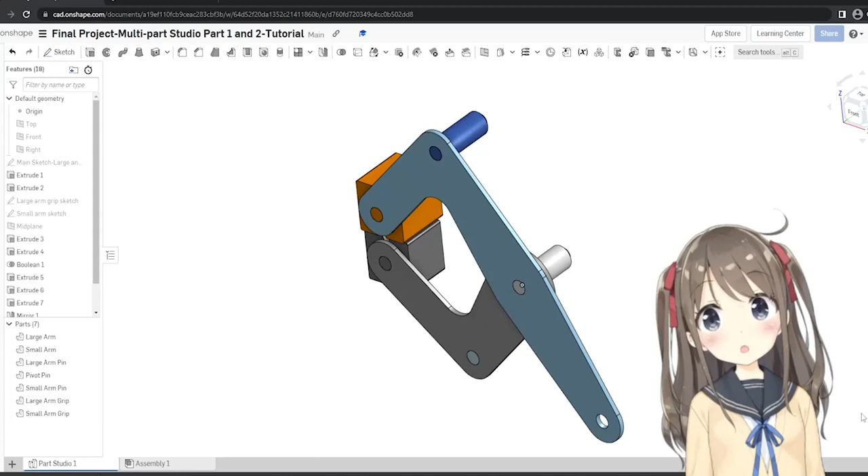Hi, good day everyone. On this short video, we're going to perform a comprehensive tutorial about making a multi-part studio, emphasized by deriving a part from another part studio. It is an excellent way to assemble parts as a flexible design output with the help of knowledge gained from computer-aided design exploration. In this tutorial, we will introduce a thorough application of what Onshape can do. The design we are going to make is a clamp, which will contain multiple parts of a component as well as multi-part designing in a single part studio, without motion, which will be done in assembly.

Before we start sketching our part studios, click on Workspace and change the units to millimeters. You can also change this to kilograms, and start a new sketch on the front plane.

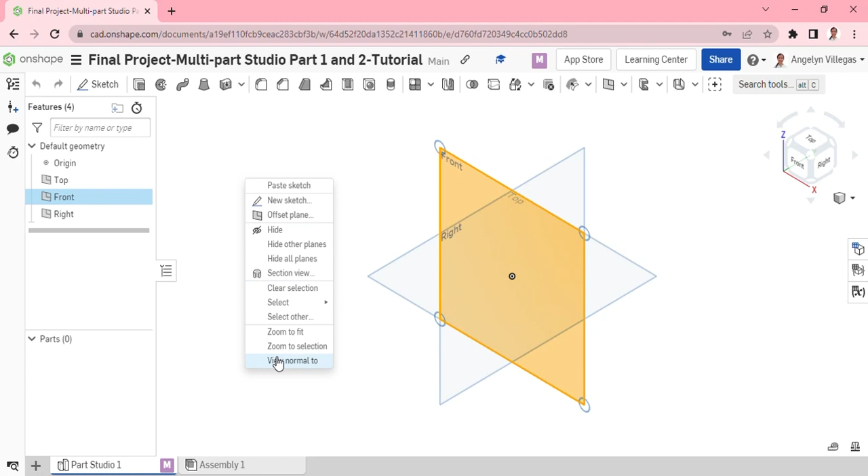Right-click and select View Normal to Sketch Plane. Right-click again and hide all the planes. Then click Line, draw a horizontal line coming from the origin, and draw the rest of the lines.

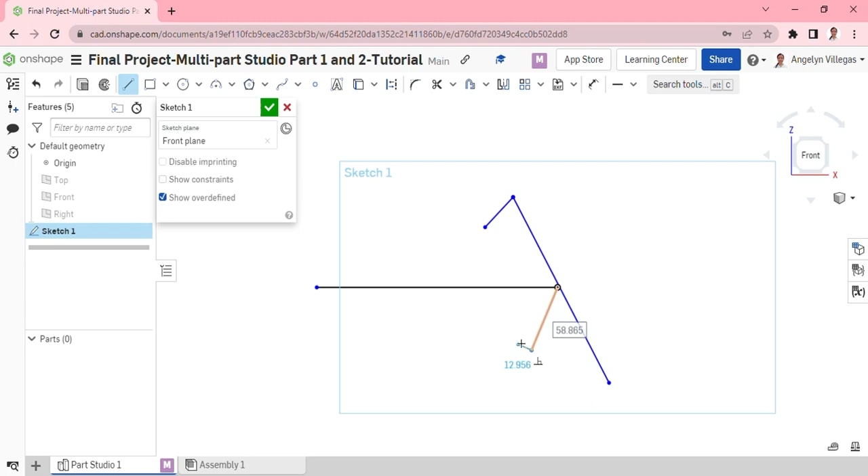Select all the lines drawn and make them construction lines. Select these three lines and click Equal. Select this line and the origin, then click Midpoint. Select these two lines and add Perpendicular. Then select this point and this line, and select Symmetric.

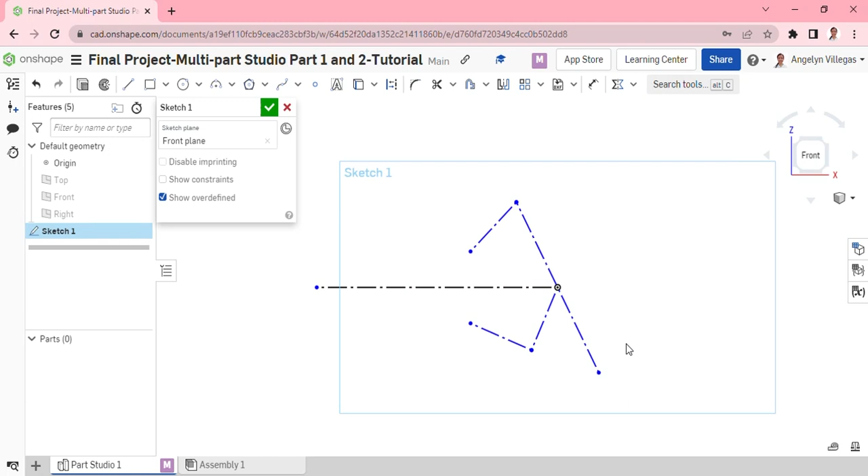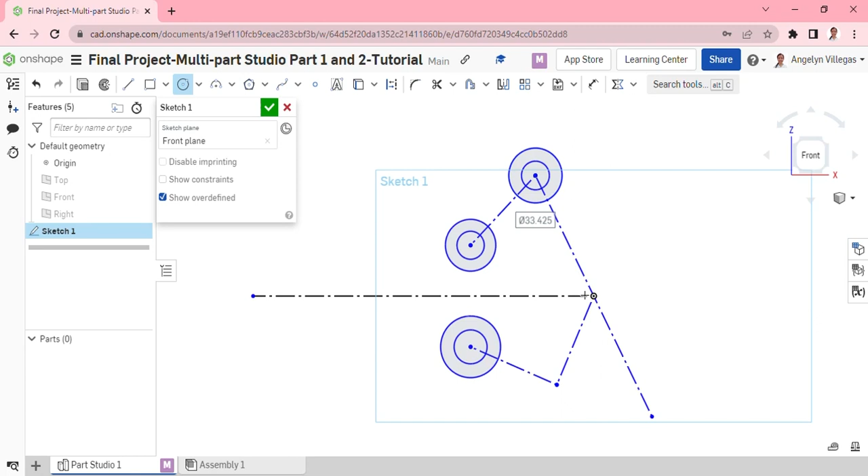Next, draw several circles, a smaller inner circle and a larger outer circle, on all the vertices and endpoints. Then select all the inner circles—there should be 6 of them—and click Equal. Now select 5 outer circles, except the one coming from the origin.

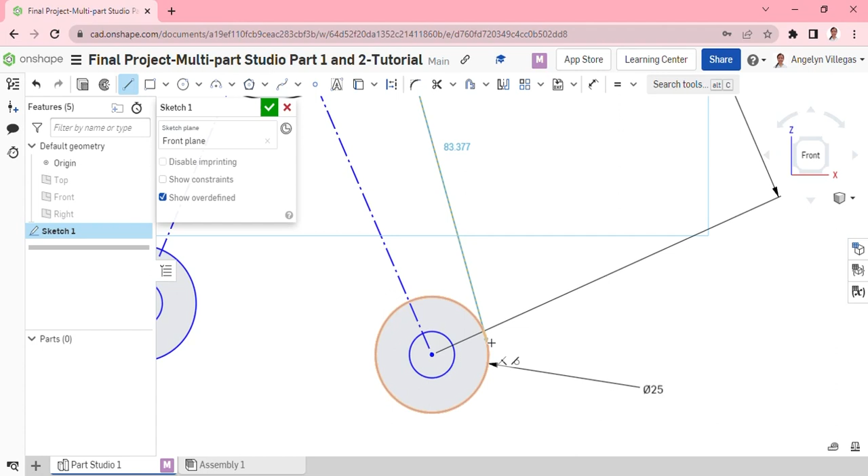Next, draw the following lines. It should be tangent on the circles as the line reaches the other circle—watch for the tangent icon to show up. This one's going to be different; it's not going to touch that circle, but it will touch the circle to the right of it. Look for that tangent icon.

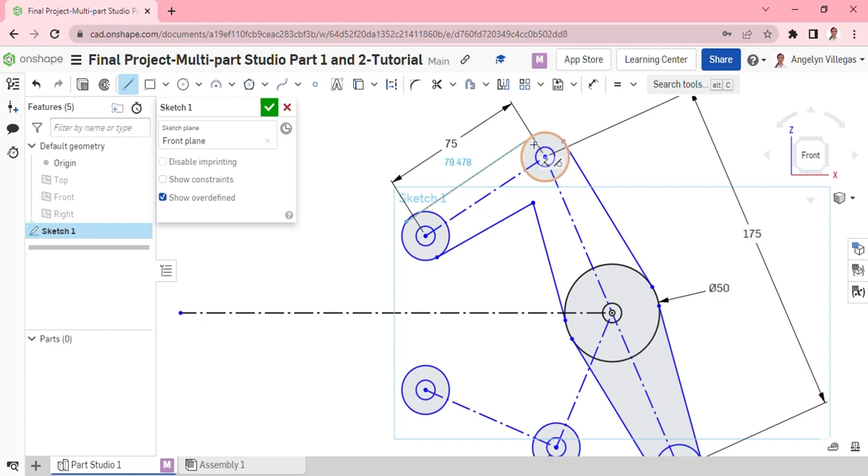Next, select these lines and these circles and click Tangent. Then do it for the other components as well.

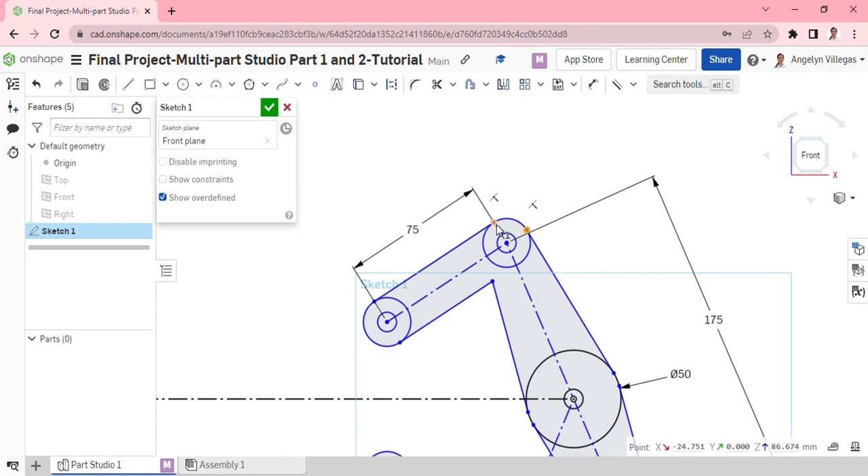Now select these two-point vertices right here and select Horizontal, and it should make most of your lines black, or fully defined. Then observe it in View Normal to Sketch mode.

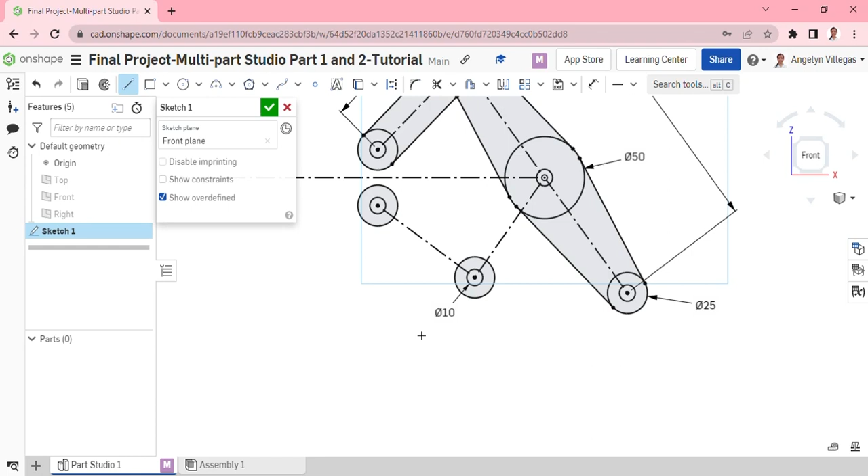Continue drawing lines from this circle to this circle, and this circle to this circle, watching for the tangent at the following points. Look for the tangent icon to show up. Add the constraints again: select this circle and designate Tangent, then click this circle and this line for Tangent, and so on once again.

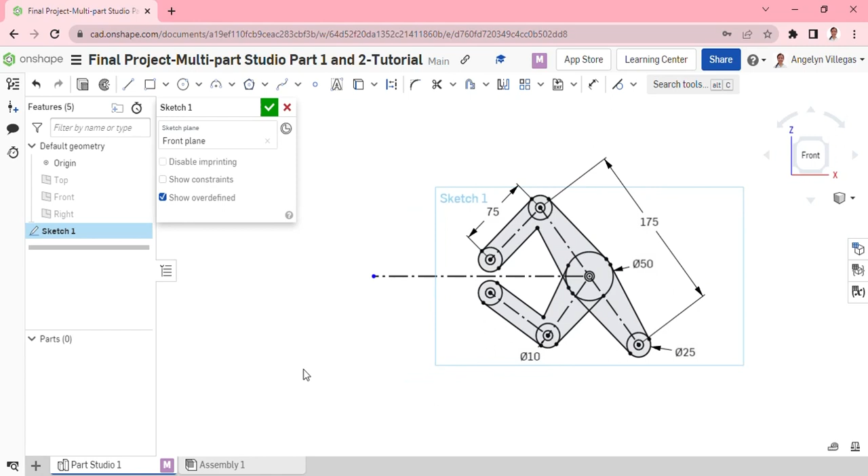After it all, check it out in View Normal to Sketch. Then accept it as the main sketch, for the large and small arm.

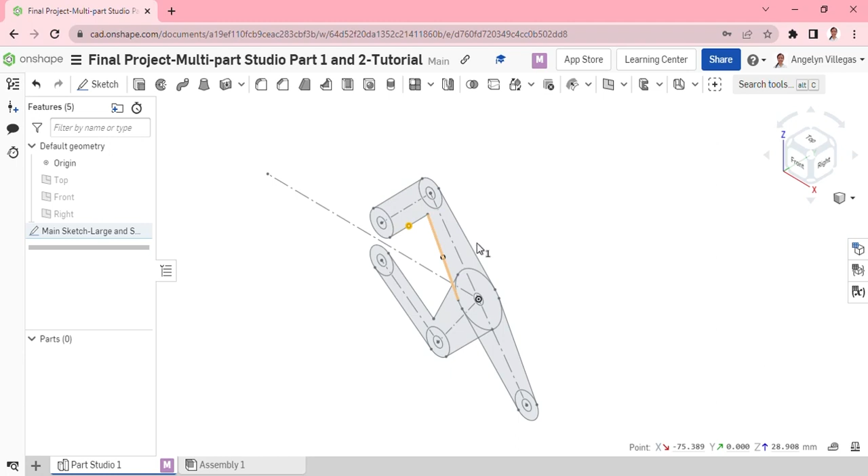View it isometrically, then select that portion to define the sketch.

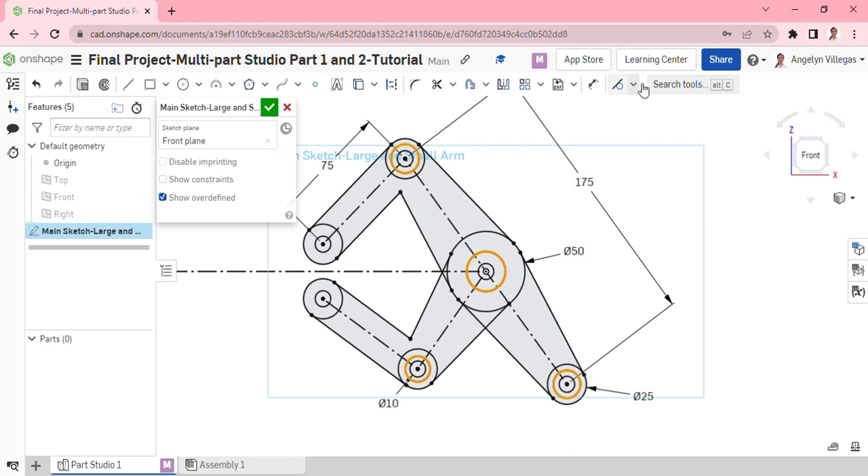Select and create all 4 circles here, and point out Equal mode. Then select on the sketch, fill it, click on those 2 points, double click on the number and type 15. Click to fill it and click Equal.

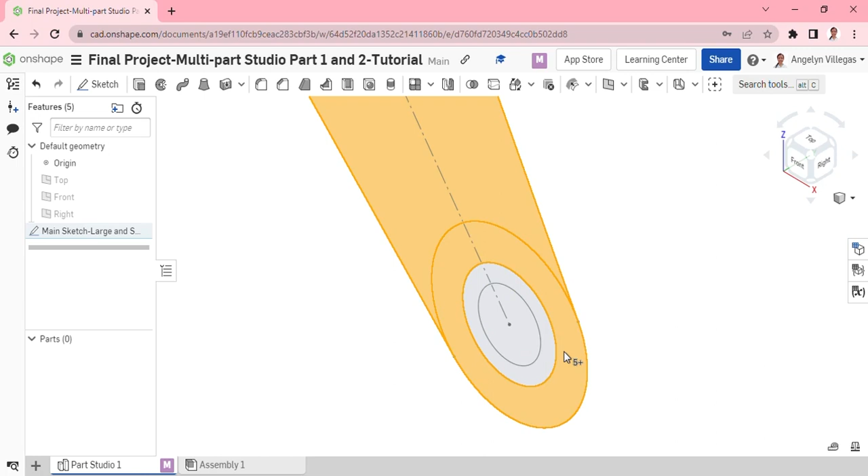As the piece is in isometric view, click Extrude as the main sketch is being highlighted. Set the depth as 5 mm and make sure these faces here are all part of the selection.

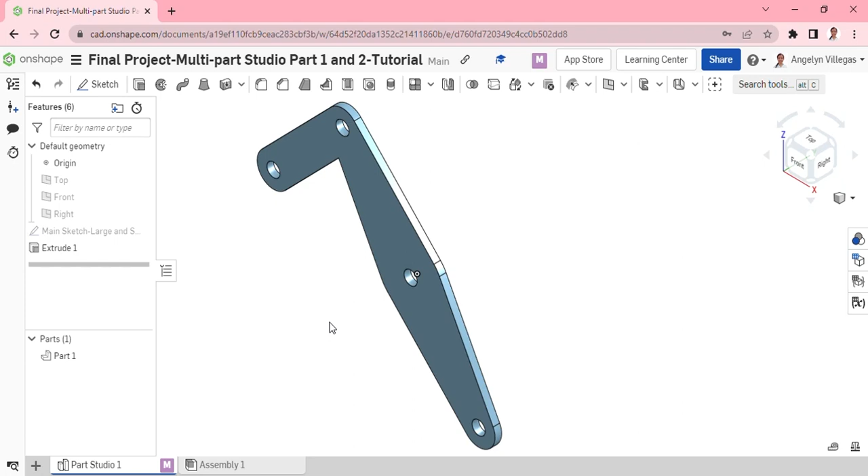After this process, change the name of Part 1 into Large Arm by selecting these spaces.

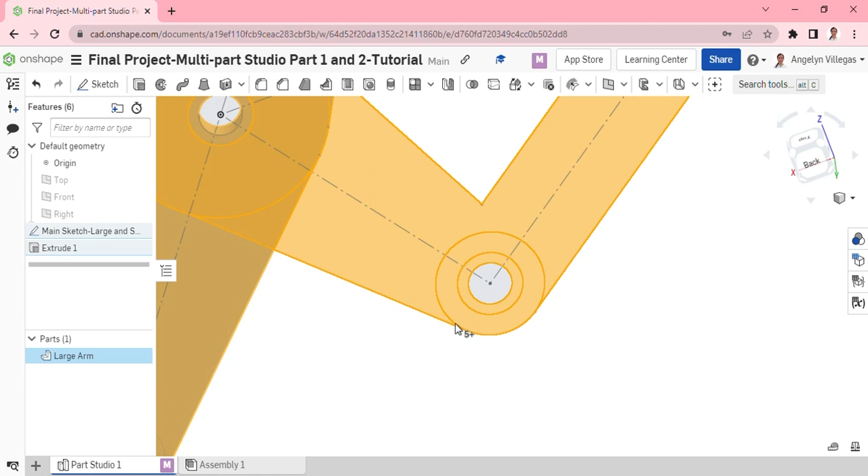Select Extrude. Select New Extrude with a depth of 5 millimeters, and then accept.

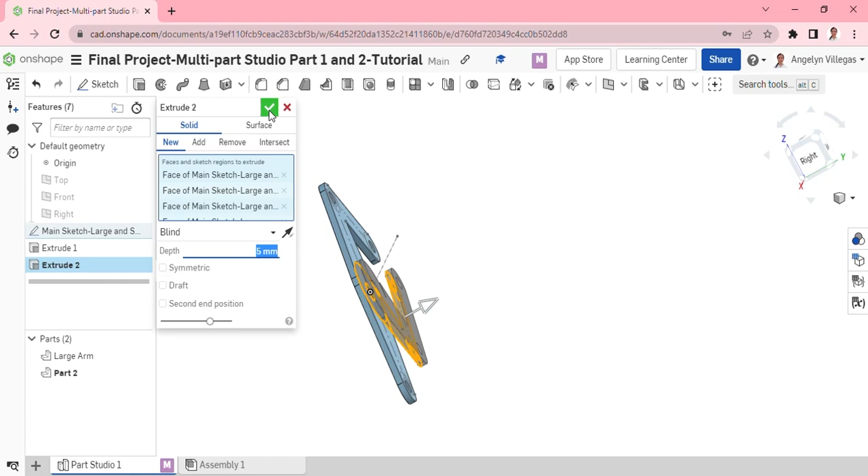Rename Part 2 as Small Arm, and then let's view and check it isometrically.

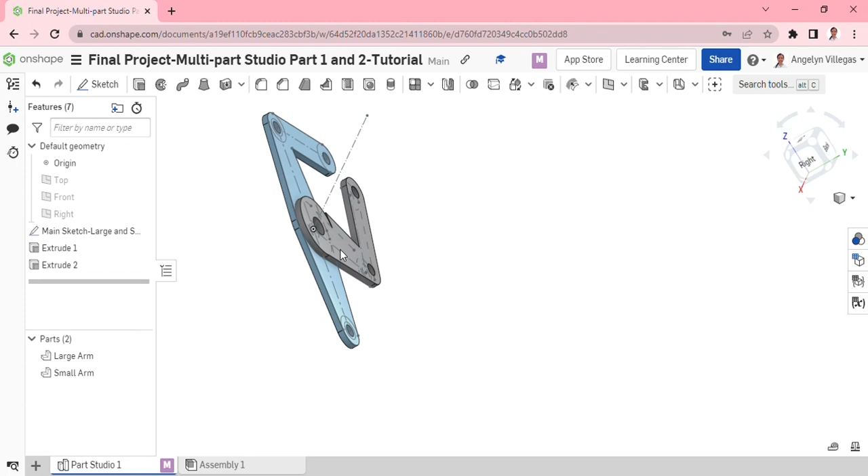Zoom it out and pick this section. Then select Sketch, View Normal to Sketch Plane.

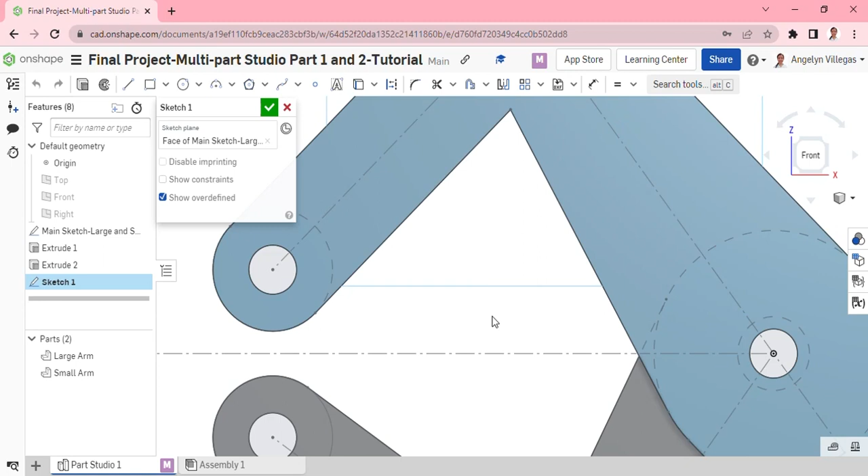Then wait, as it may take a few moments since the tool has quite unrecognizable behavior.

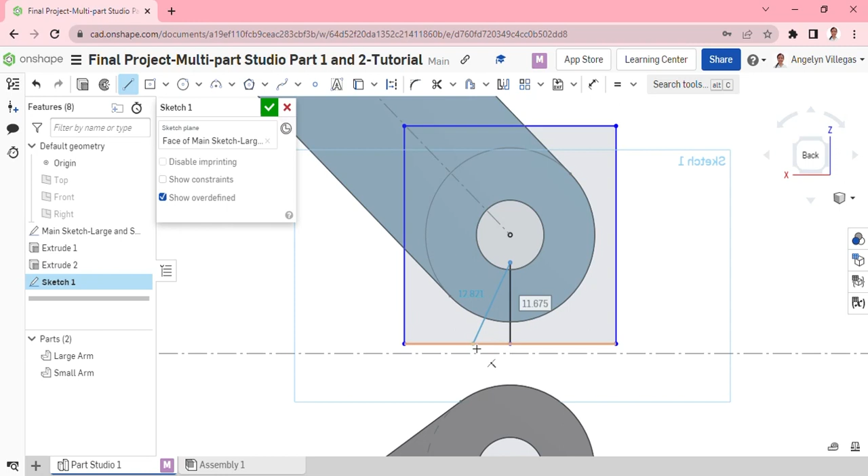After creating the shape, select the Line tool and point it out here upward, then like this, and do it on the other side as well.

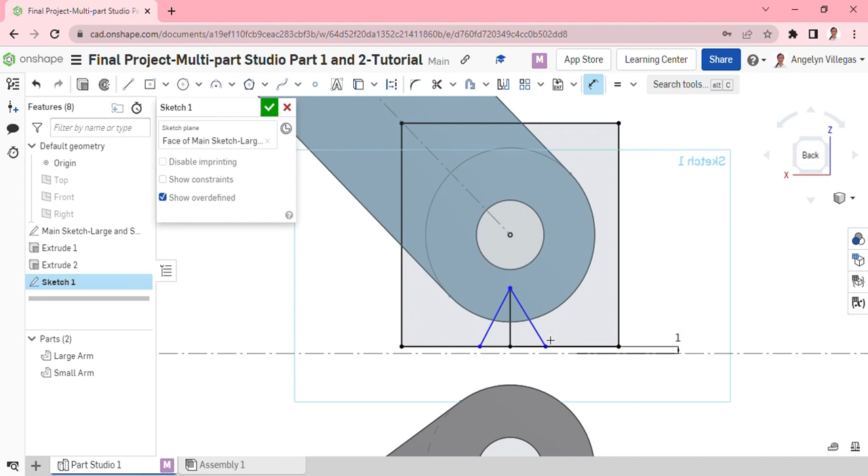Click the construction line at the base of the line of the square and put 1 as its dimension. Then from that vertex to the base is 10, same with the base itself.

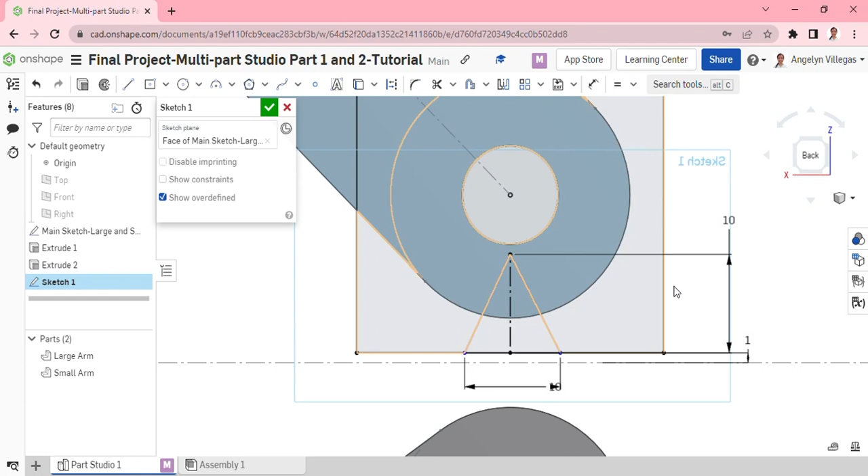We can select this line and make it a construction one. Then this side, or these two lines, we will make equal. Then before we check it out or validate it, let us rename it as Large Arm Grip Sketch.

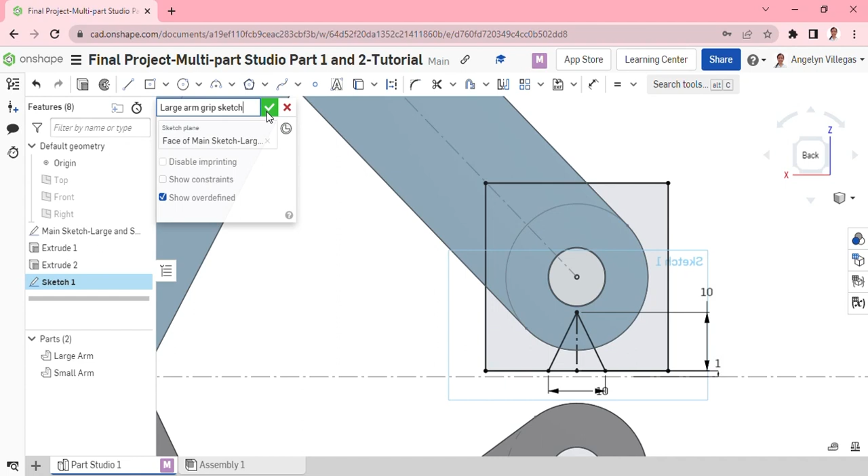After that, we can select this one for the extrude portion of our object. Here, we can edit it out to make it good.

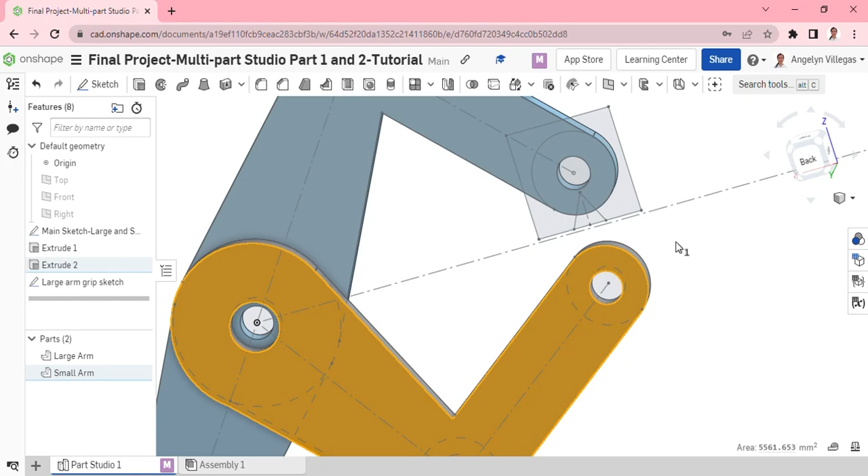After that, we can view it isometrically. Then we can zoom it out and rename it as small arm sketch.

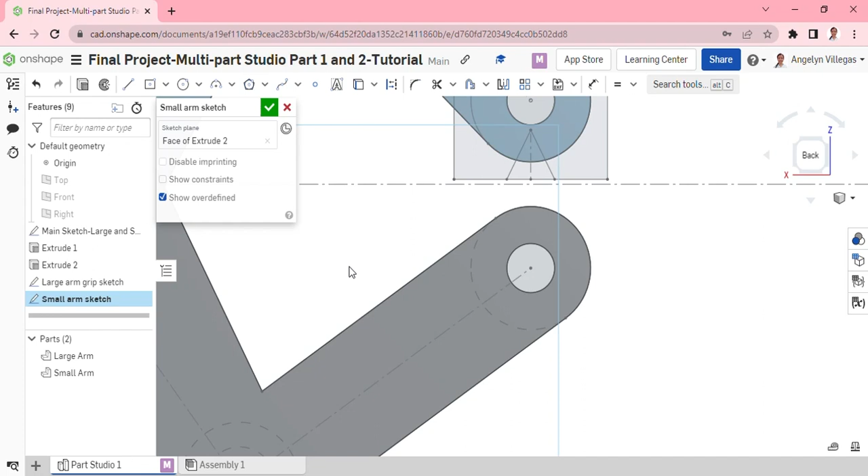On the upper portion, we can click the square mode that we're going to use here, like this, from the center point itself.

As we can observe, it is just a similar portion of the upper object here, of the upper square that is being shown. We're going to have this as the dimension of this in millimeters.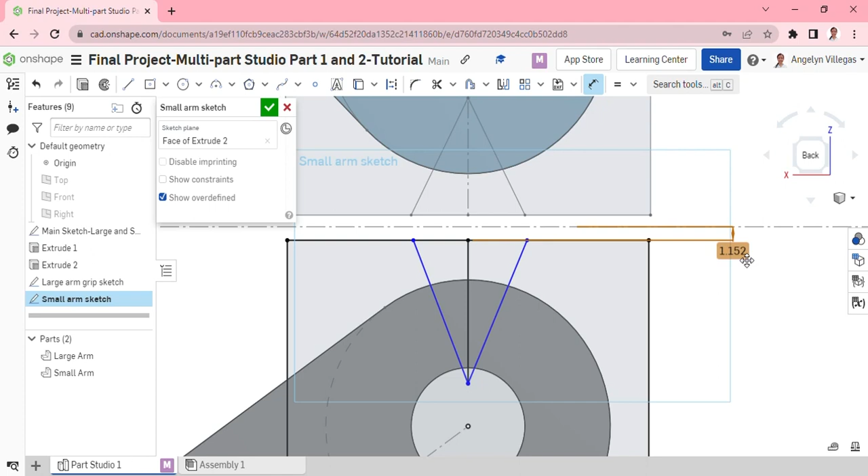Then this one, we should make it as construction. Then from this point to this point, we can make it as a dimension in millimeter, as 10 millimeter.

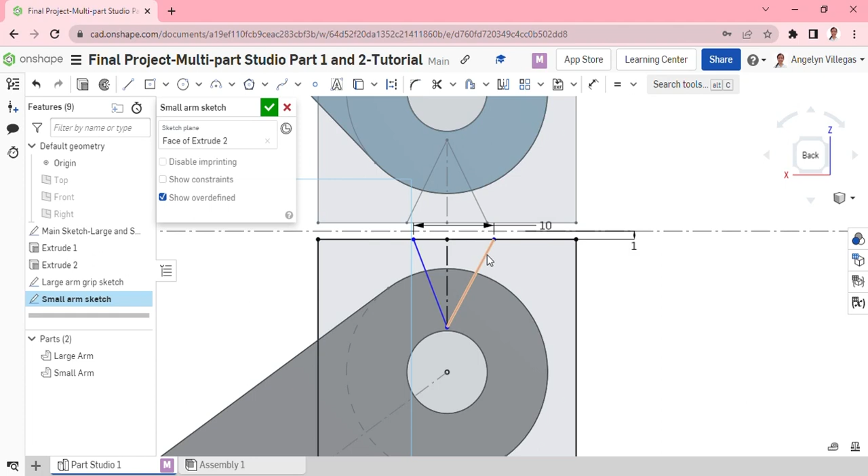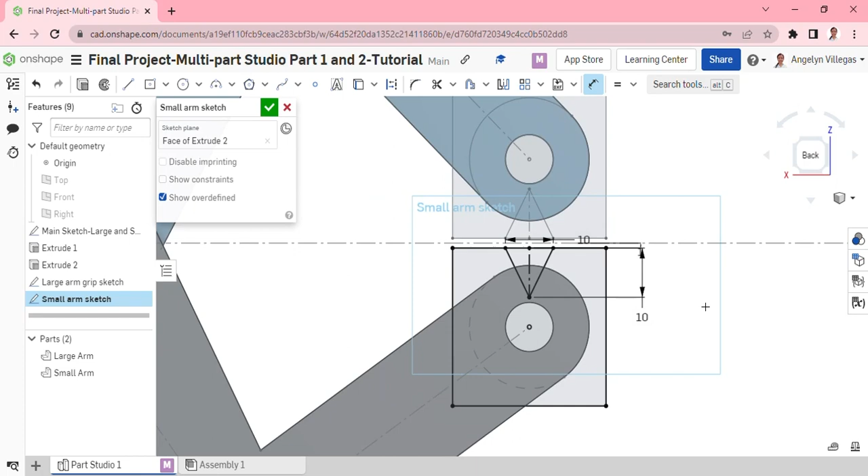Afterwards, we can check it out. We can select this one and make it in an equal form. If that's good enough, then we can have it as 10 millimeter as well. Okay, we can check it out like this and validate it.

You can view it isometrically to be more precise in every detail of the object. As for continuation, select the plane tool and choose entities, then offset the distance to 25 mm.

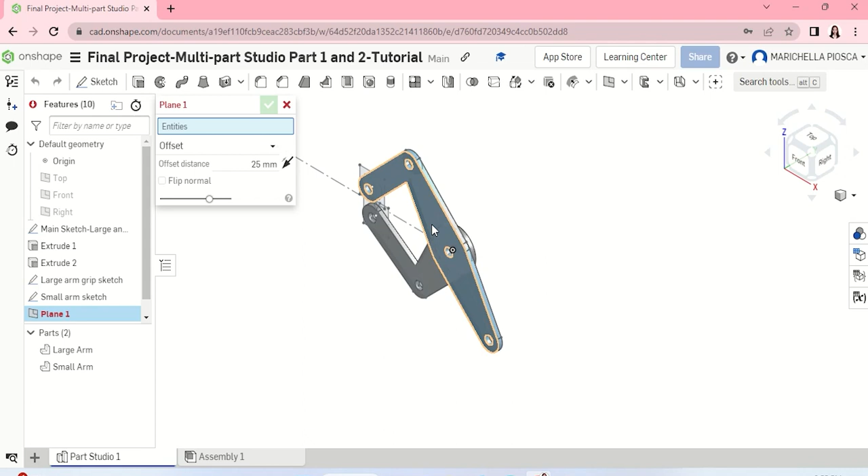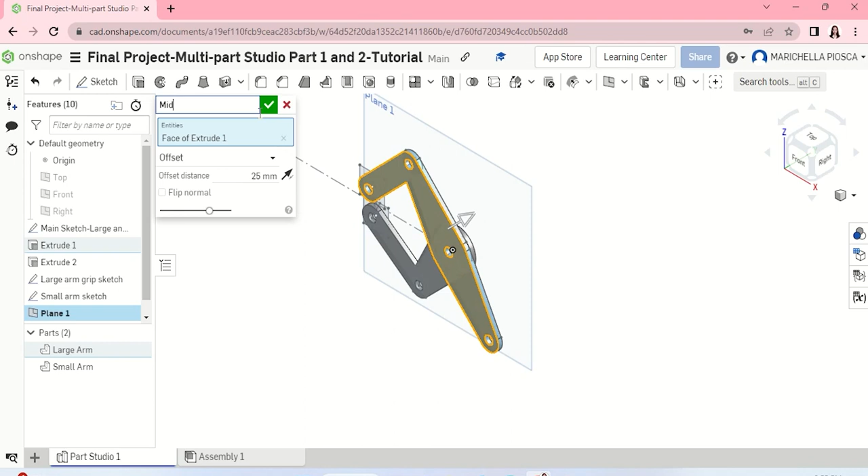Name it as midplane. Hide the arm grip and small arm sketch. Move the clamp to the center of your working area. Click on the following parts so the only part not selected would be the smallest circle.

Now click Extrude, and we're making a new solid with a depth of 5 mm. After paste, accept the part and select the midplane while extruding it.

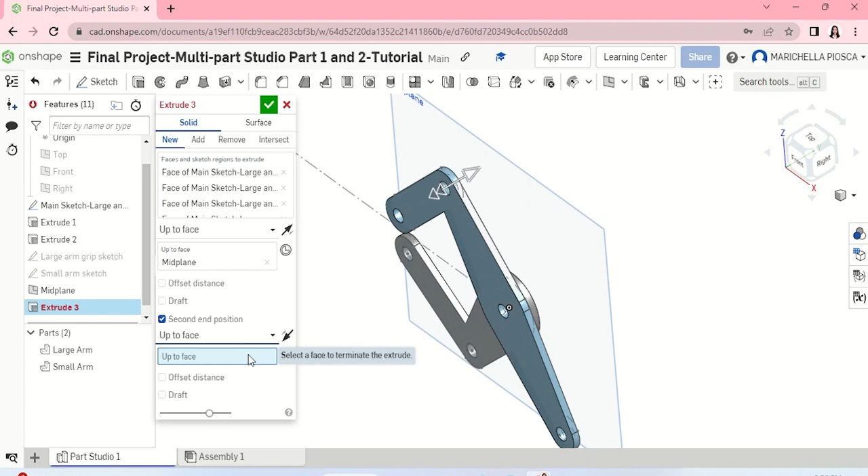View it isometrically. Reveal the large arm and select its inner circle while extruding it smoothly.

Rename the part 3 as large arm pin. Part 4 as pivot pin. And the part 5 as small arm pin.

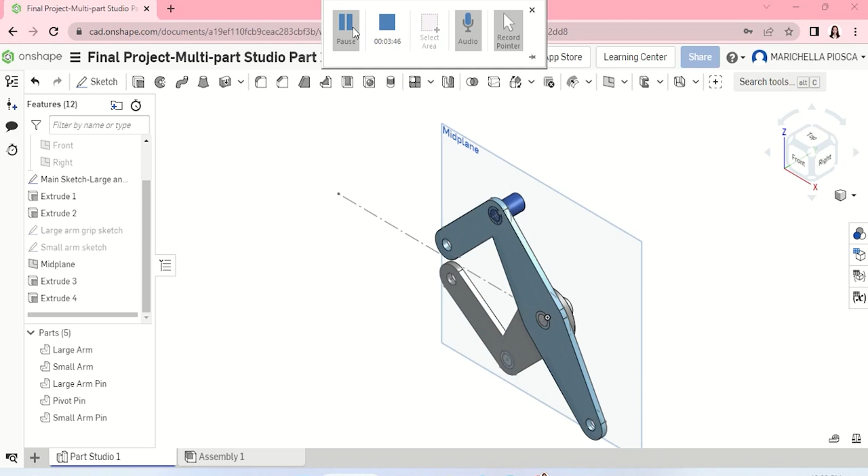Then view it again isometrically. Click the Boolean tool, then subtract.

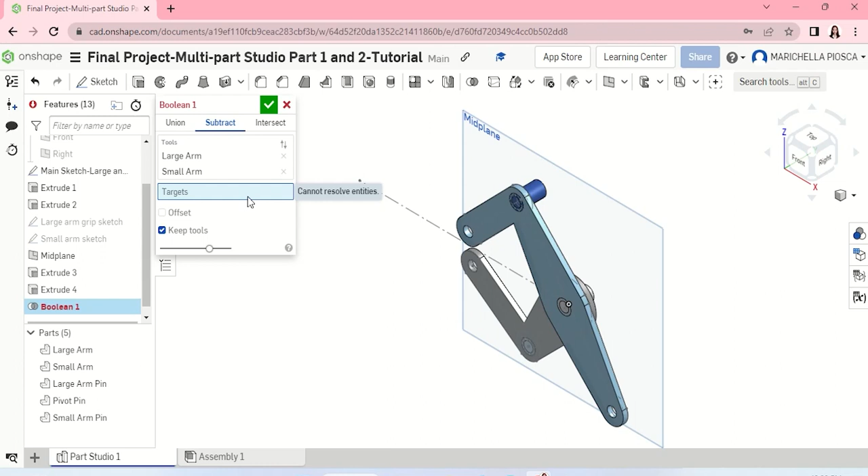Select the large and small arm. Then choose large arm pin, pivot pin, and small arm pin as the main target. Then accept it.

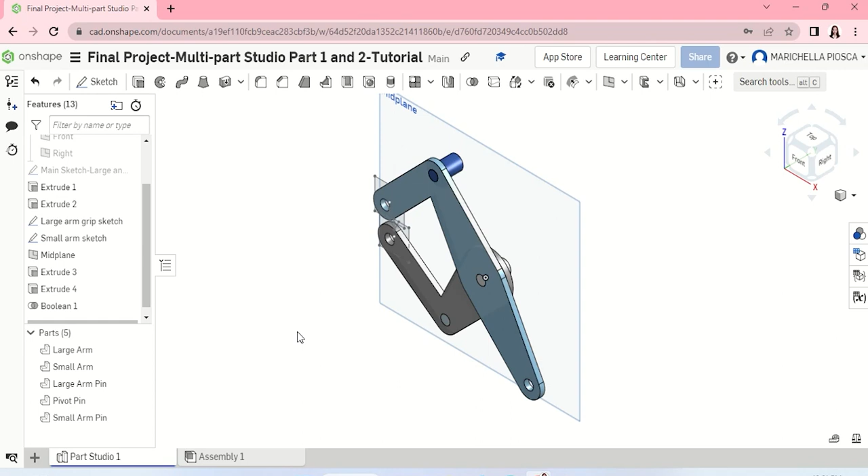Show the large arm sketch and hide the main sketch. Explore it at different angle and focus on back view.

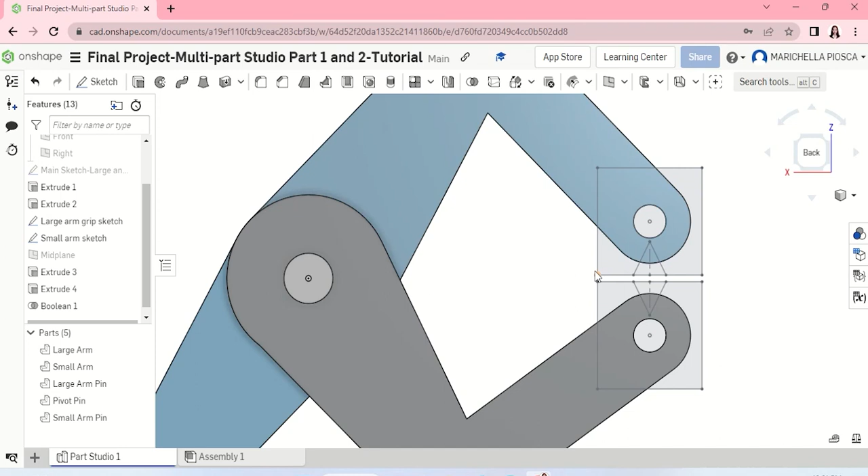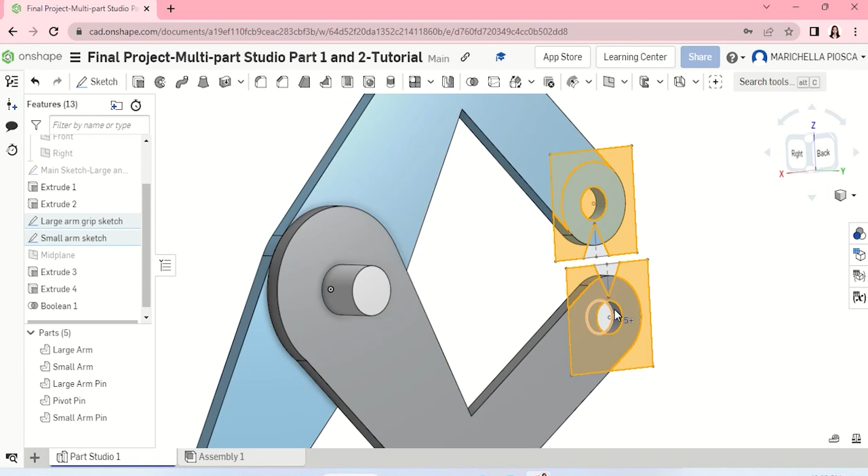Then select all these portions and hide the mid-plane after. Select Extrude and choose up to mid-plane.

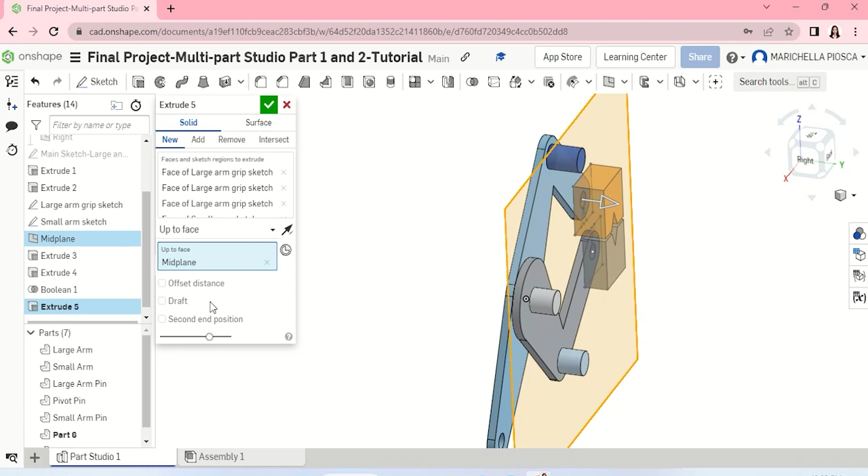Then accept it. View it again isometrically. Then rename part 6 as large arm grip and part 7 as small arm grip.

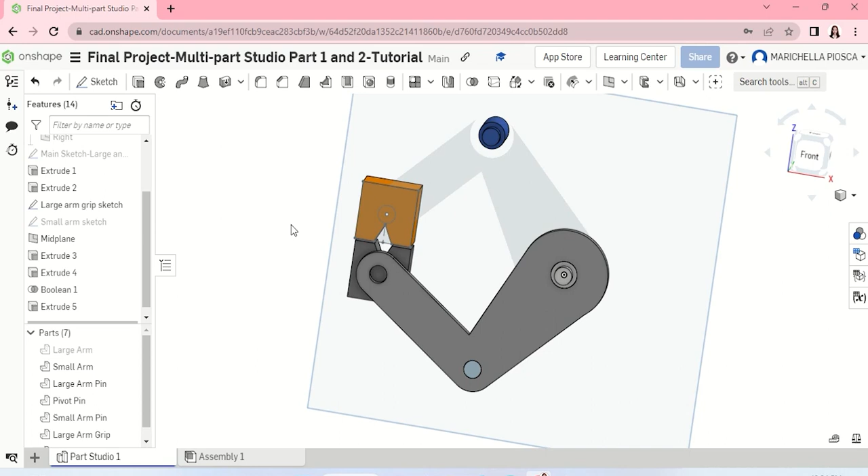Hide these features. Select Extrude tool once again and choose Add Mode, then show the large arm.

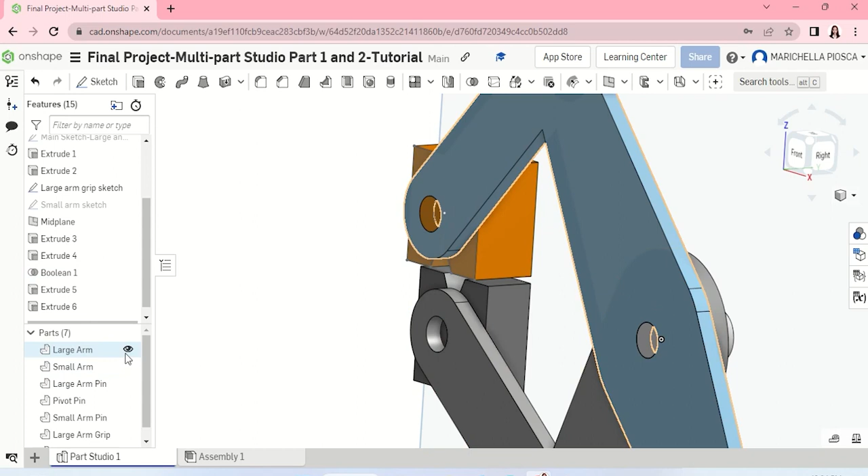Click up to face of extrude 1. Then choose add merge scope. Then accept the sketch. Hide the large and small arm for checking.

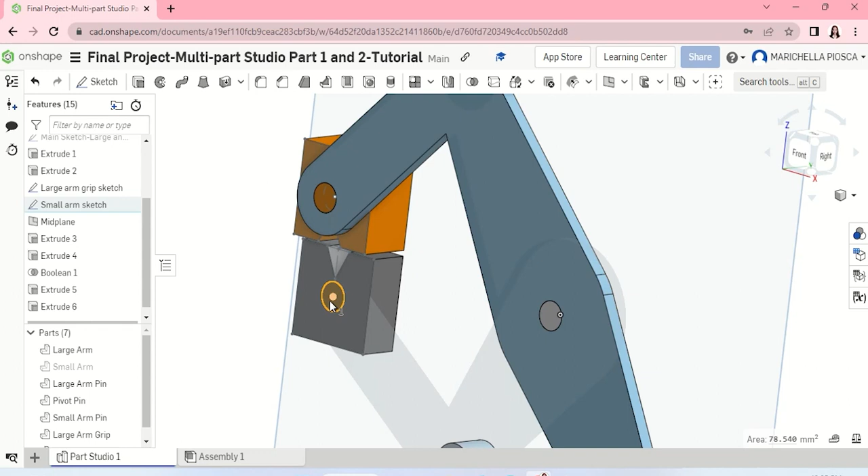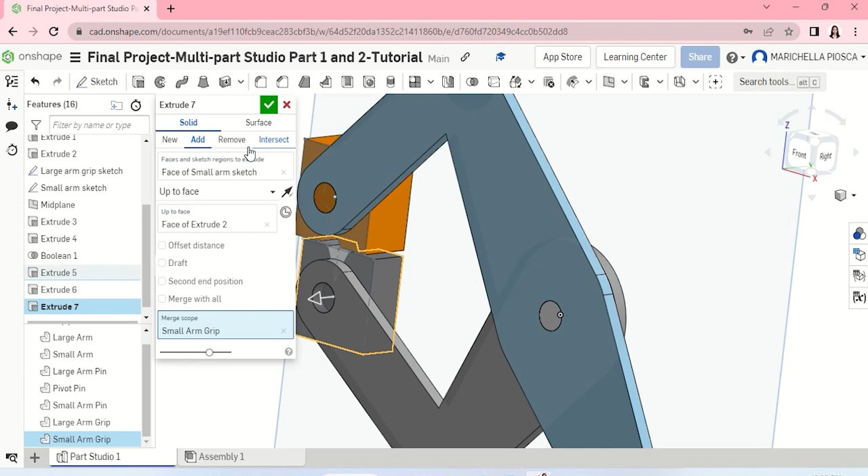Then select those inner circle and extrude it up to face and merge scope at small arm grip. Then validate the sketch. Hide the small arm for checking, then show it after.

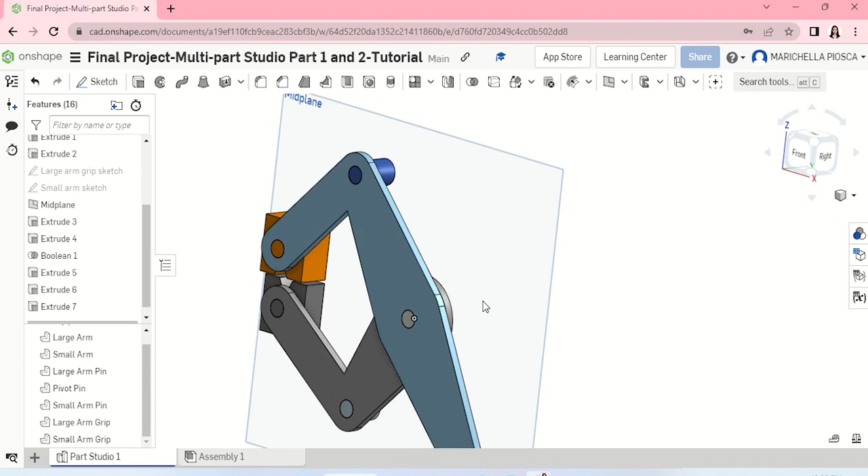Also hide the large and small arm grip sketch as we focus on some angle of the object. Add mirror entities of large and small arm pin and grip, and pivot pin as well.

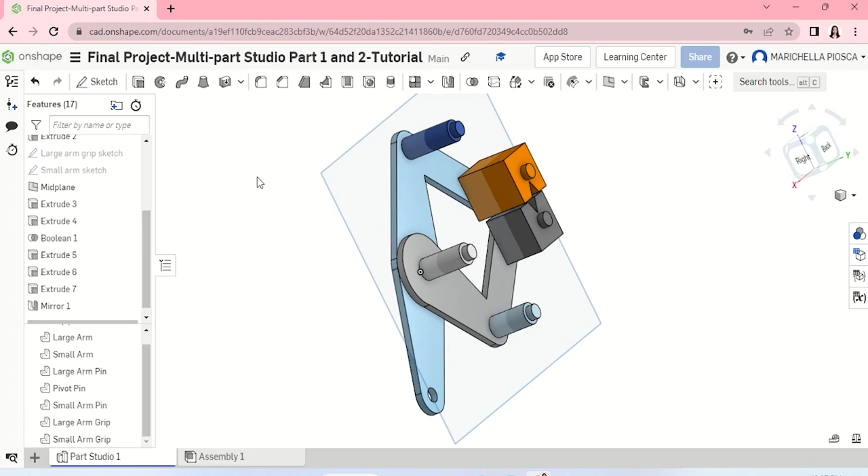Select these portions. Click the fillet at edge of this part of extrude 5, like this, with a radius of 3 mm.

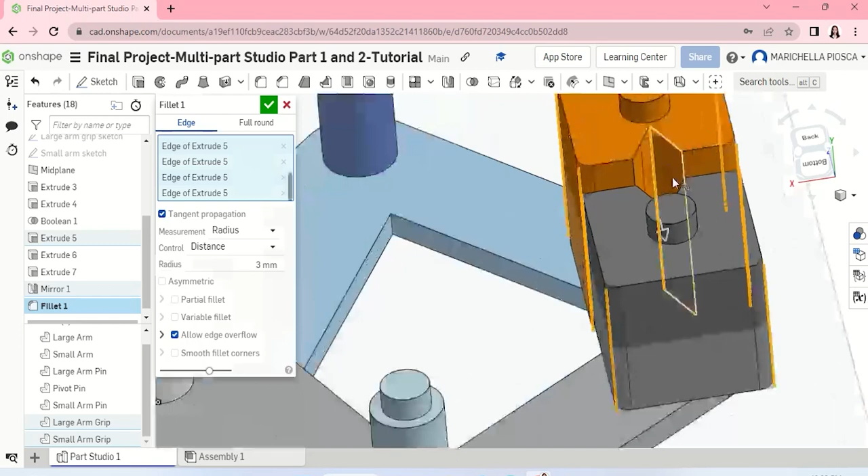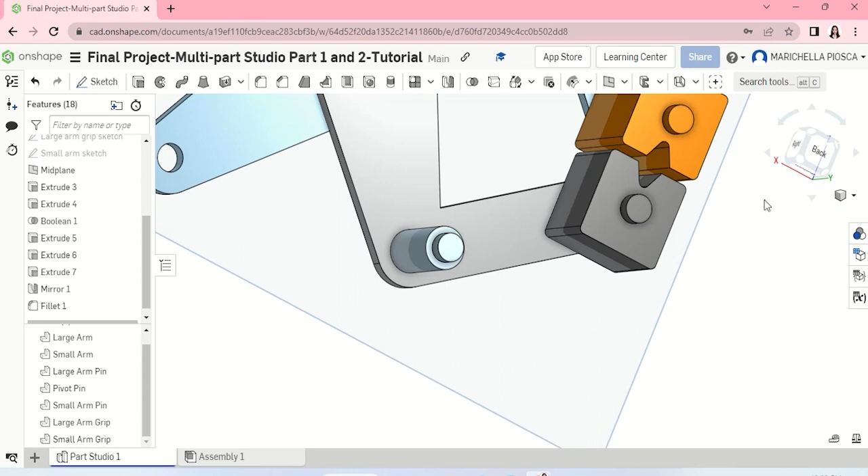Then validate the sketch after. Explore it, then view it isometrically. Select all of these features or parts.

Right click and assign material. As we will be assigning a material for all of these 7 parts, search for aluminum 1060 material. And then accept.

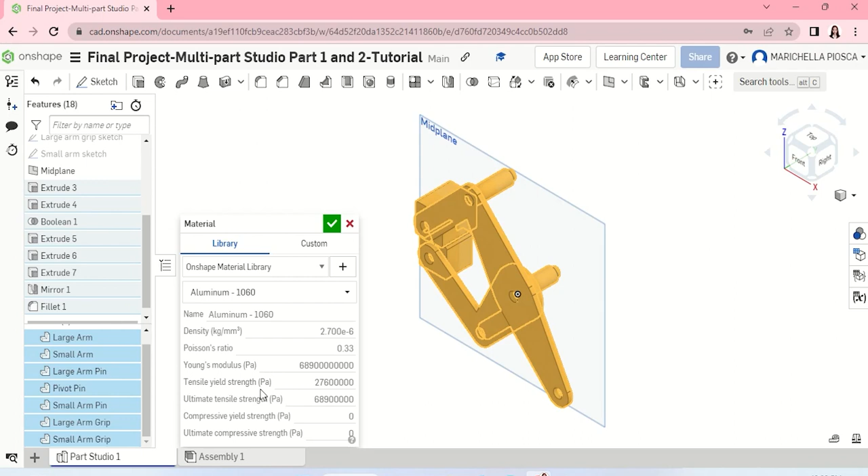Edit the main sketch, view it on a normal sketch plane. The large and small arms should be modified. Modify these dimensions like this.

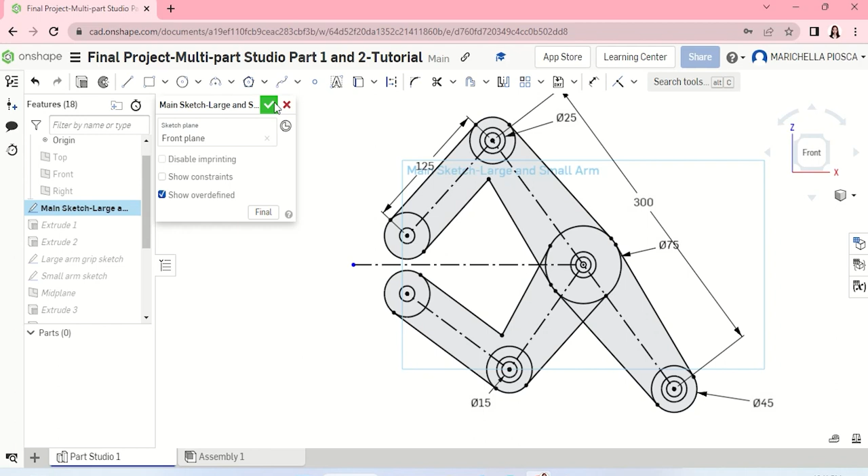And then accept the sketch. You can select this mid-plane and make it in an offset distance of 35 millimeter. And after that, we can accept and validate the sketch.

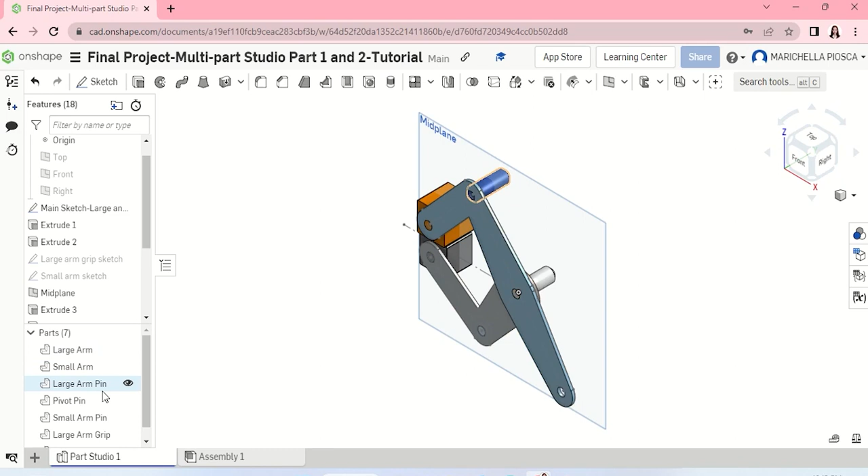You can check it out like this one, or view it isometrically. And after that, all the features we can select it all like this, from large arm to small arm grip, and go check the mass properties of this object. Okay, that's it.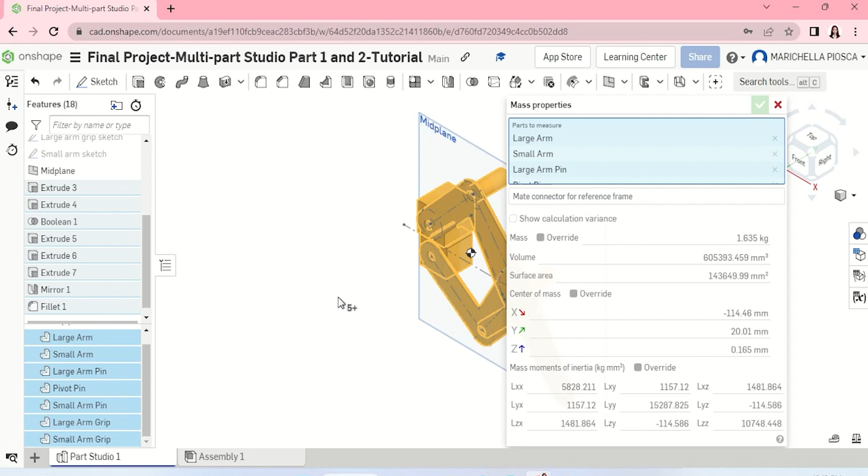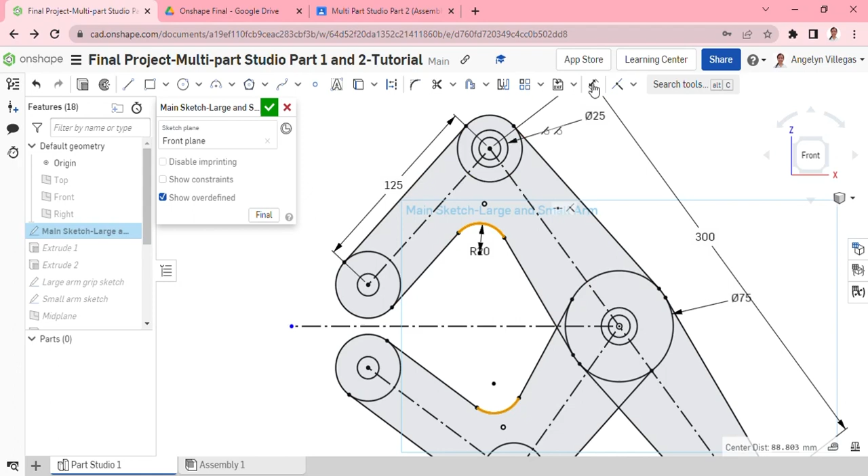As there are a few changes, click the main sketch and edit it. Then click on the curve tool and select the point and set the radius of 20 mm. And click equal and accept the sketch.

This output tutorial was indeed an excellent scheme providing the process of deriving multi-part objects into a great assembly development. It is a simple to complex mode of exploration at Onshape app. As final words, we're proud to say that we did it! An exceptional multi-part studio. Thank you and have a nice day everyone.